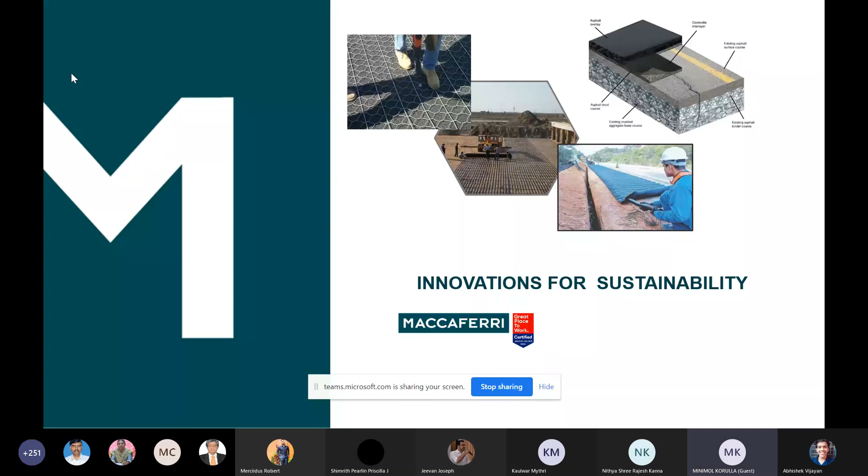But what we need to see is whether the knowledge, the selection criteria, the monitoring part, the quality considerations, whether the awareness is really penetrating to the academic arena. That is very, very important. Without it being implanted in the mind of the future engineers, it can never ever become an accepted popular technology. So I take it as one of my missions that wherever it is possible, I try to share this part of the knowledge and see what are the frank feedbacks and responses coming from the new generation. So I would like to understand the feedback from all of you. You may not have to share it with me immediately, but you can very well write to me later.

So the flow of my presentation is some introduction, of course, then pavement optimization and drainage. I talk about the aggregate scarcity. Kilometers and kilometers of road are getting developed in India, getting repaired, and we are hearing that even in the COVID time, one of the agendas of the government is to make more infrastructure projects happen.

So the road sector and the railway sector are going to be the main fields where the government wants to invest money. But at the same time, the natural resources we cannot use in plenty. So pavement optimization, if some material or some technology is helping us, that is really a very appreciable move.

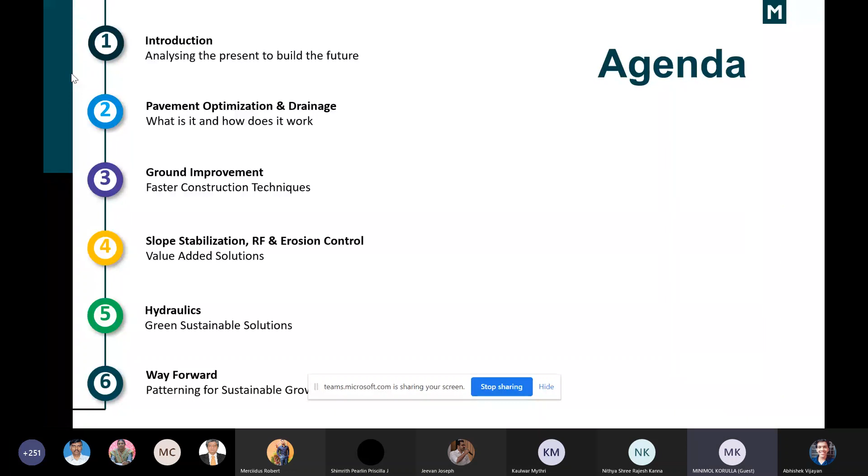Then hydraulics. Definitely, we do have a very big coastal environment, and India is a land of rivers, especially holy rivers. But all these rivers and our coastal areas are subjected to a lot of erosion and other calamities. So we need something which can protect and stabilize these shores which are subjected to hydraulic forces. So these are the main touch points which I want to share with you, and what can be the mission forward.

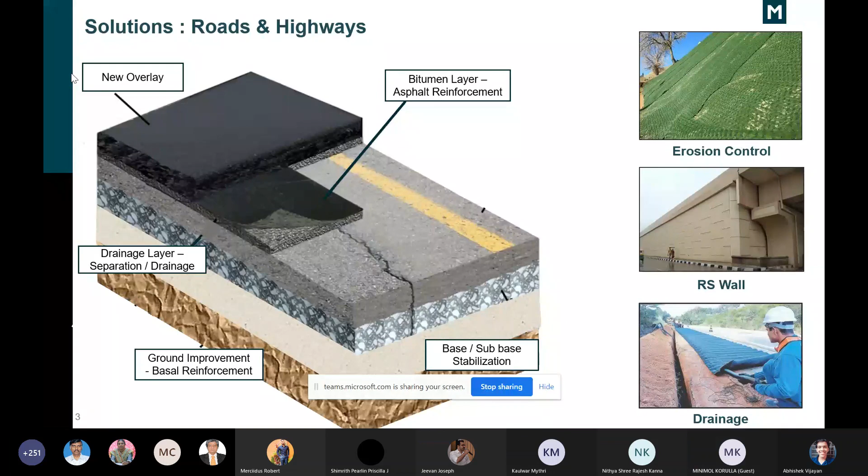So coming to roads and highways, I'm more talking about flexible pavements, even though these types of innovative products can be used in rigid pavements. One of my earliest works in India started with rigid pavements, but let me start with flexible pavements. We know that the flexible pavement is made of different components, starting from the bituminous part, then base, sub-base, and subgrade. In the base and sub-base, the aggregate consumption is maximum. If we can introduce one material which may have an extra cost, but at the same time the aggregate thickness can be reduced, then definitely it will be an advantage, provided the durability is also enhanced.

So one of the geosynthetic products which is helping us here is geogrid. So now comes the question: if I am introducing a geogrid in a pavement layer, the durability is enhanced and the thickness can be reduced, then how do I know which type of geogrid has to be used? So a selection criteria is required. Where will we get the selection criteria? When we are talking about base and sub-base treatment, we will get the selection criteria from the specifications in the Orange Book.

I don't know whether you are aware of the Orange Book. The Orange Book is the standard specifications written for the Highway Ministry for every construction material. For all geosynthetics, Clause 700 is completely devoted to geosynthetics. In Section 700, we will get the specification of the geogrid which can be used for base or sub-base reinforcement. In the same chapter, you can get the specification of the drainage composite for the drainage function, as well as for asphaltic reinforcement. If we want to reinforce the asphaltic layer, again for increasing durability, we can go for geosynthetic inclusion or glass fiber inclusion. That is also in the Orange Book.

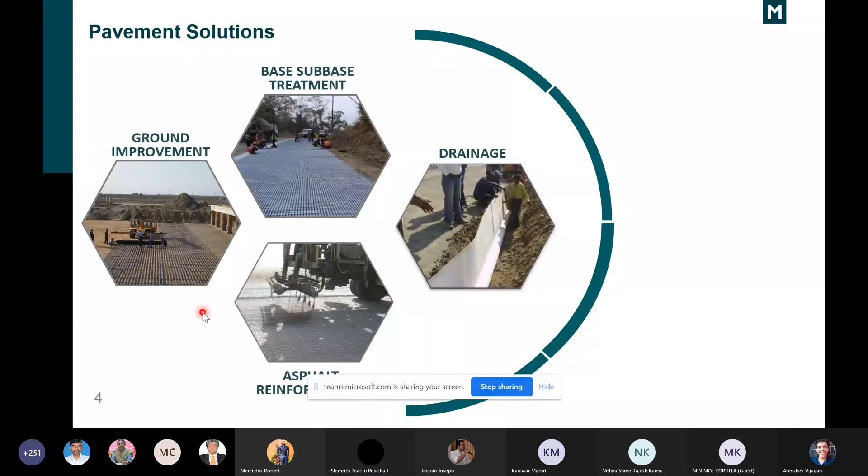Okay. So the summary of this slide is the geogrids. It is a tension element. We will come to that more. Geogrid is a tension element. It can be used in base or sub-base reinforcement of the pavement, which can reduce the thickness and it can increase the durability. It can be used in ground improvement, where we can combine it with the PVD, or it can combine with the stone column, or it can combine with the piles.

It can again be used in asphaltic reinforcement, maybe with the glass fibers or as a standalone product. And this will increase again the durability of the asphaltic layer. It will reduce the tendency of reflective cracking and other types of cracks.

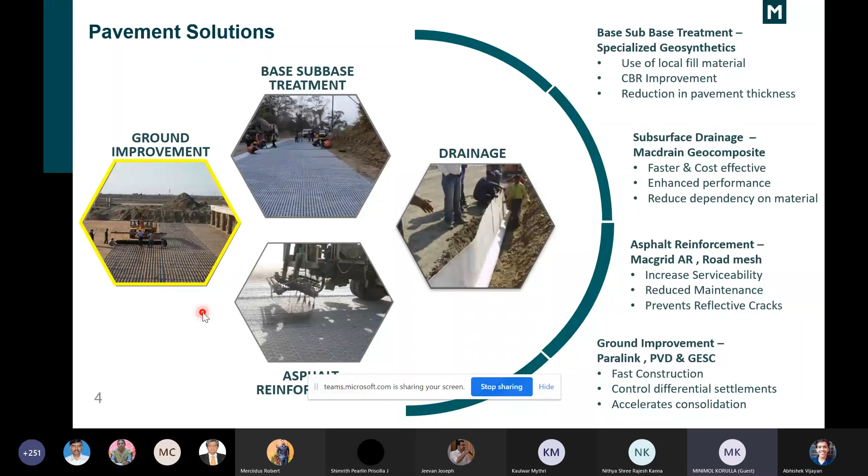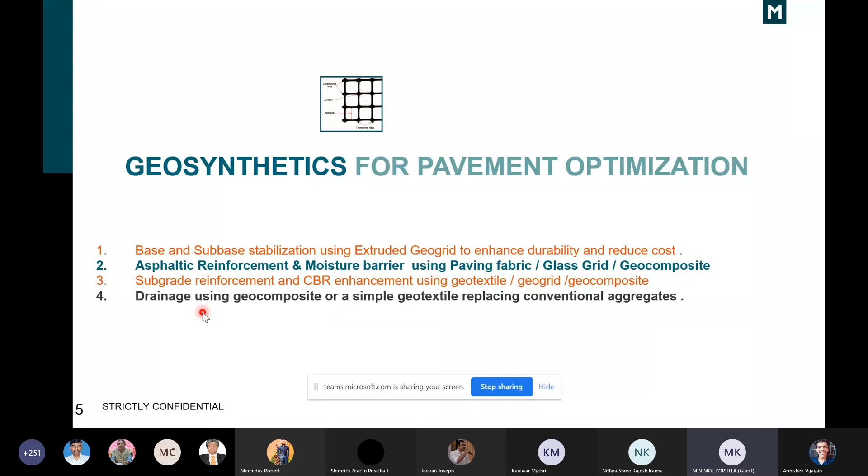So now the question is the pavement optimization, how these geosynthetics can be used. Okay. So before that, what are the other types of geosynthetics? Okay. So geogrids, we have seen that they have very popular applications, but it is one part of the family. Okay, there are brothers, sisters, and cousins. So we will see which are the other materials which are useful for civil engineering applications.

So the first is geotextile. It is a cloth, and even here subfamilies are there, like woven geotextile and non-woven geotextile. So woven geotextile is something where, like a textile, warp and weft direction is there. Non-woven geotextile is usually classified as needle punched or thermally bonded, depending upon the manufacturing method.

So the different polymeric filaments, if they are bonded by thermal means after being randomly placed, it is called a thermally bonded non-woven geotextile. Okay, it will be randomly placed. It will not be placed in warp direction and weft direction. If the bond is by mechanical means, like it is pressed together, then it can be called a needle punched non-woven geotextile. So non-woven geotextiles are basically used for hydraulic purposes, like separation.

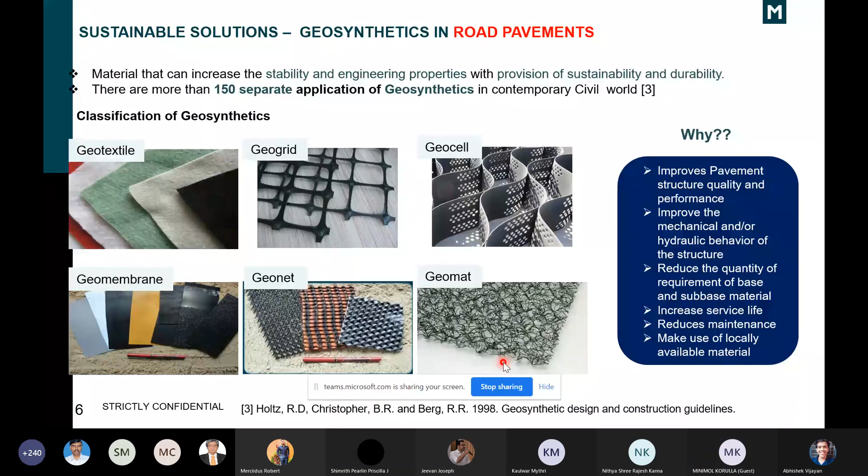So we talked about the base and sub-base application of the GeoGrid, as well as subgrade, asphaltic reinforcement and drainage. We can start again with the roads only. As I mentioned, when we are placing a geogrid, especially an extruded geogrid with higher junction efficiency, it will increase the interface friction and interlocking of the aggregates, and there is a membrane effect.

So when the traffic load is there, and even the dead load of the pavement itself is acting on it, different strains will come in the pavement layers, tensile and compressive in nature, and the geogrid, wherever it is inserted, will bend like a membrane, and this membrane can give extra mobilized shear resistance like a pre-stressed tendon, contributing additional strength. So with these three mechanisms, the resistance offered against traffic loads and self-weight will be much better than the non-reinforced pavement.

And as I mentioned, the drainage composite, the drainage net sandwiched between two geotextiles, can replace a subbase, especially the drainage component. So when we are using these products together, we may be able to reduce the pavement thickness significantly.

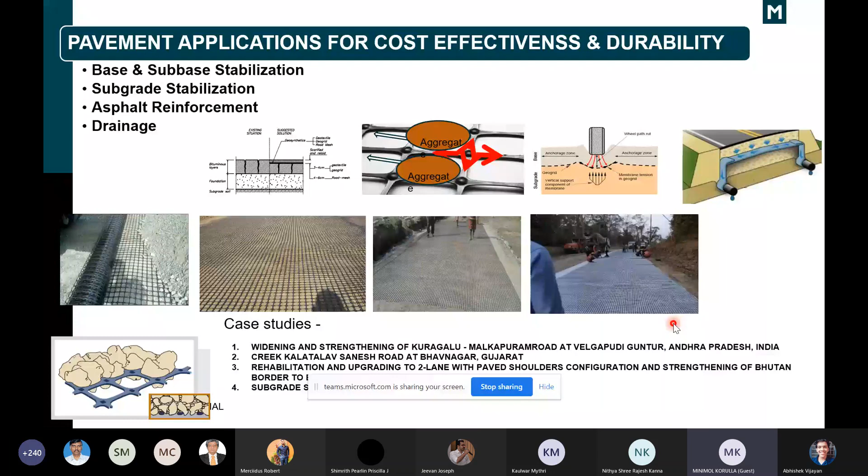Now coming to the asphaltic reinforcement, we can use polymeric products as well as glass grid, and sometimes a combination composite combining the paving fabric and glass grids. The advantage is the prevention of reflective cracking, where cracks propagating from the bottom layers of the pavement come to the surface, and during monsoon time water goes inside and the cracks become wider. This gets prevented by the inclusion of a paving fabric or a composite where glass fiber elements and polymeric elements are combined.

So how does the selection happen? It depends on the traffic load, the type of durability we want to enhance, and of course the fund availability. For example, glass fiber inclusion is one of the cheapest, whereas there is a steel mesh called road mesh which can be incorporated as asphaltic reinforcement. If we want to increase durability by say 20%, we'll go with glass fiber only. But if we want to almost double the durability, we may go for the road mesh, though the cost will be more. If glass fiber inclusion costs say 200 per square meter, road mesh may be 600 to 700, but the durability will be almost doubled.

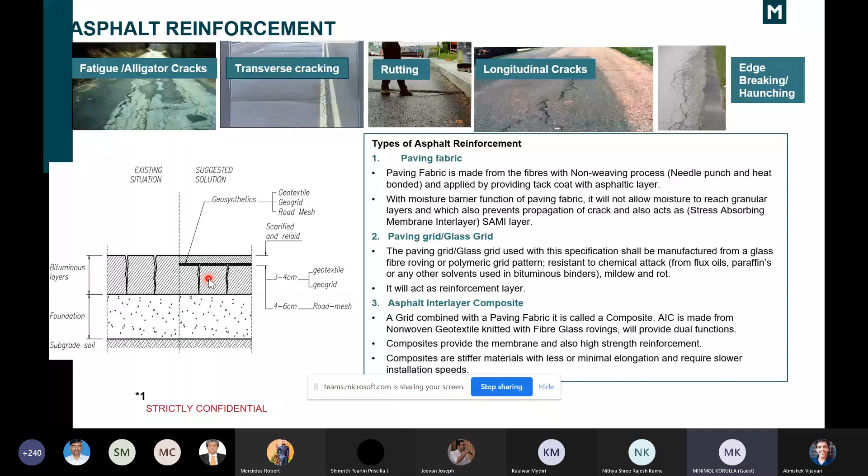So the design factors are, apart from the strength, the stiffness of these elements as well as the pavement components, the CBR value, the modulus value. Apart from that, definitely the durability is one of the design data, and the fund availability will also be governing as one of the inputs which need to be considered.

Now coming to the drainage. We already spoke about the drainage composite, which can save space, which can save aggregate, and it can be used in the horizontal direction as well as the vertical direction.

So what are the horizontal utilizations of the drainage composite in railway track or in roads? When we are going for a road, we have to give the longitudinal drains as well as provide transverse drainage. We have to give culverts, and even in the pavement, we have to give the subbase layer.

So here, when we replace it with a drainage composite, what are the main considerations? The main considerations are the ability to carry water, the discharge carrying capacity is the most important. So here comes the comparison.

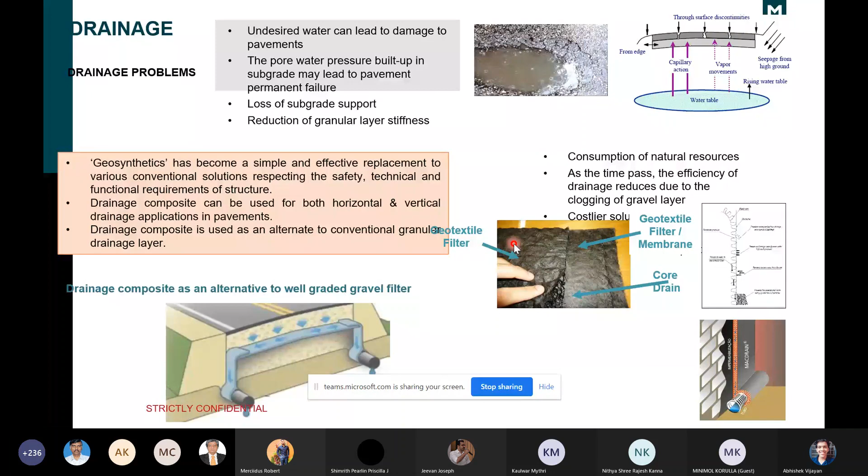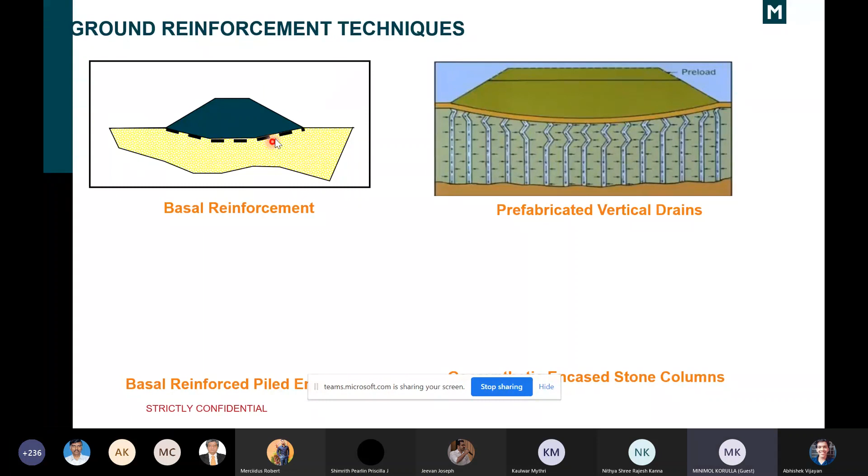Okay, now let us go to another application of geosynthetics: ground improvement. The geosynthetics have a very good ability to reinforce the ground, acting as a basal reinforcement.

It can do wonders. In many projects, one of the projects which was a real challenge to address the liquefaction potential was the Gangapath Expressway. I was involved in that project and we were really worrying how to account for the liquefaction potential, and at the same time the project had to be completed within a specific time with a budget limit. The basal reinforcement, a bonded geogrid, we used in Gangapath Expressway, and that eliminated the use of very deep ground improvement techniques.

Of course in some places they had to use dynamic compaction with the basal reinforcement, but in many places the deep ground improvement requirement was eliminated by the use of the basal reinforcement.

So it acts like a raft which allows redistribution. It will be a stiff layer. Usually the basal reinforcement will be a geogrid which has high stiffness and high strength, and this material will act like a raft redistributing the pressures.

There will not be any chance of localized strains or stress, and to a good extent it will eliminate differential settlement. It will not nullify the settlement. If anyone tells you we can use GeoGrid and eliminate settlement entirely, that is totally wrong. It will not nullify the settlement, but it can minimize the differential settlement.

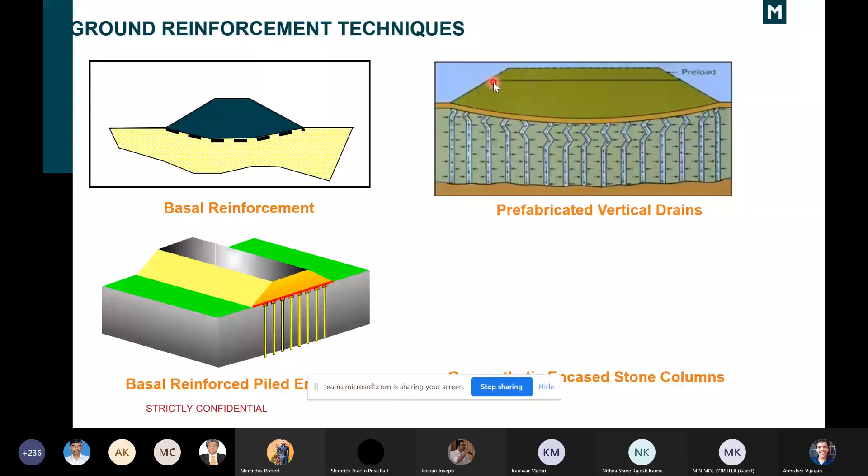So basal reinforcement, there is a design code which is published by Indian Road Congress, which is IRC 113. It is talking step by step the different principles. It will be definitely guiding the civil engineers, especially the foundation engineers and the structural engineers and highway engineers.

If we go for constructing a highway embankment over a soft soil, especially if it is in a coastal city like say Chennai or Visakhapatnam or Kochi or Calcutta. So many times we may have to construct big embankments over very soft soil, which is extending up to 20 meter or 40 meter. So that time we can really think of using a basal reinforcement for controlling the differential settlement, improving the resistance against rotational stability, sliding stability of the embankment soil, and if there is a tendency of lateral extrusion and plastic squeezing, that will get prevented.

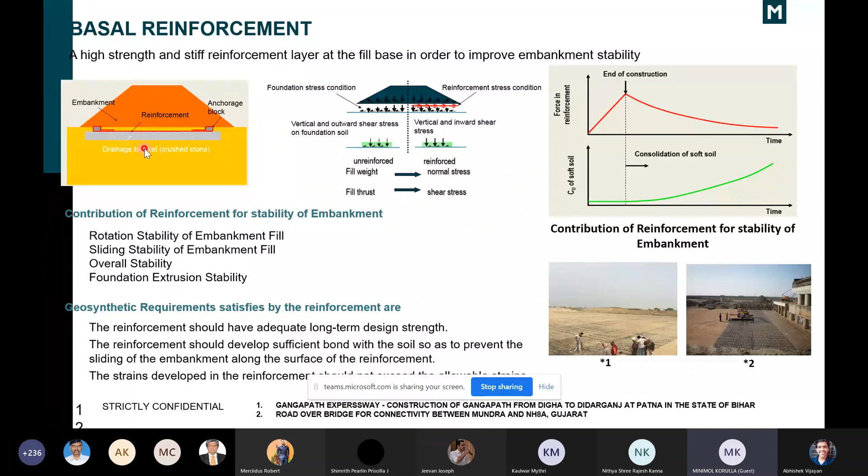But many times when we are using a basal reinforcement, we may not be getting enough anchorage length. Okay, there should be a certain length beyond the side slope so that it can get anchored. So in that case, we may have to use two anchor blocks at the end, and this geogrid can get wrapped around on these anchor blocks. So prefabricated vertical drains, I'm skipping this because the geosynthetic component is minimal there.

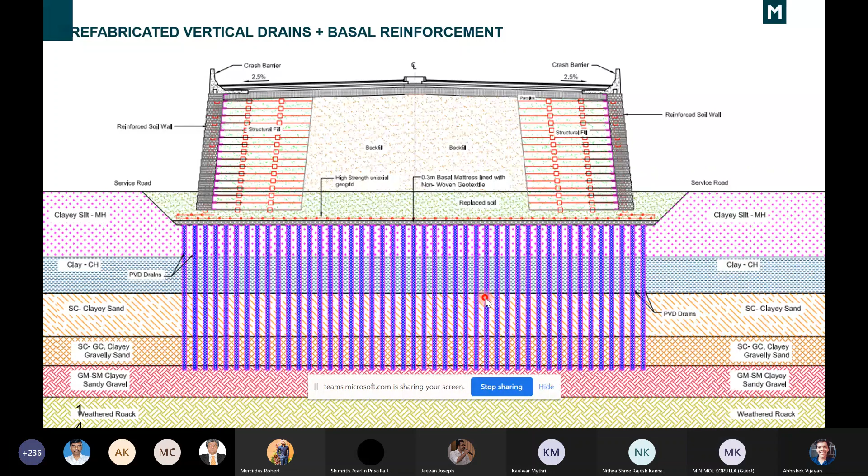So the stone columns, in that my area is not just a stone column, it is in fact geosynthetic encased stone column. Suppose if I am making a stone column, what is stone column? I am making pits in my soft soil, which is soft clay, for example, soft clay. And there I am putting my stones. Will my stone column stand there? No, the stone column may get bulged out. So if I am inserting a geosynthetic encasement, it will be called as a geosynthetic encased stone column.

And in that case, what my encasement will do? My encasement will act as a stiffening layer, which is giving an extra strength, and I can use it as a filter and separator also. It will not permit the clay to interfere with my good stones and contaminate it. So it will act as a filter and separator also. So geosynthetic encasement, it will increase the strength, it will increase the stiffness, and it can act as a filter and separator.

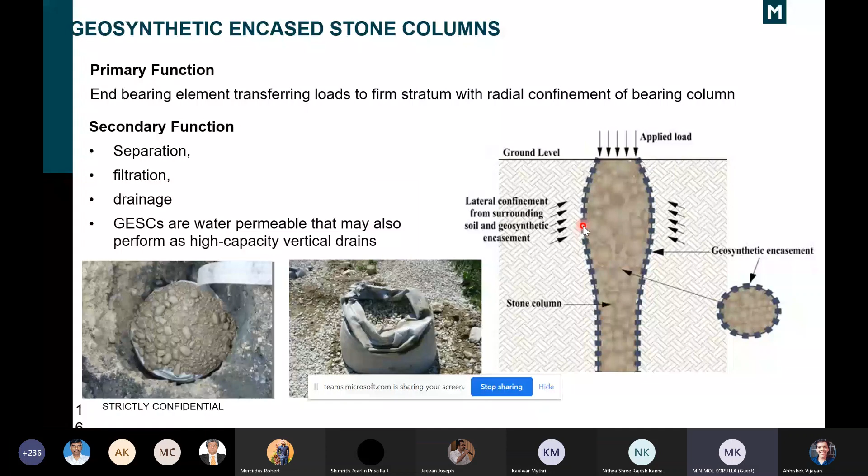So for the geosynthetic encased stone column, what we are facing at present in India, the complete design guidelines are not available. So far we are using the German guidelines, but the references about the geosynthetic encased stone column, it is in the IRC 75, the latest edition, as well as it is there in HRB 13 and 14, which is published almost 20 years before. So the code is permitting us to go for the geosynthetic encased stone column, but it has not become enough popular because for the design and analysis methods, we still have to go for the German codes.

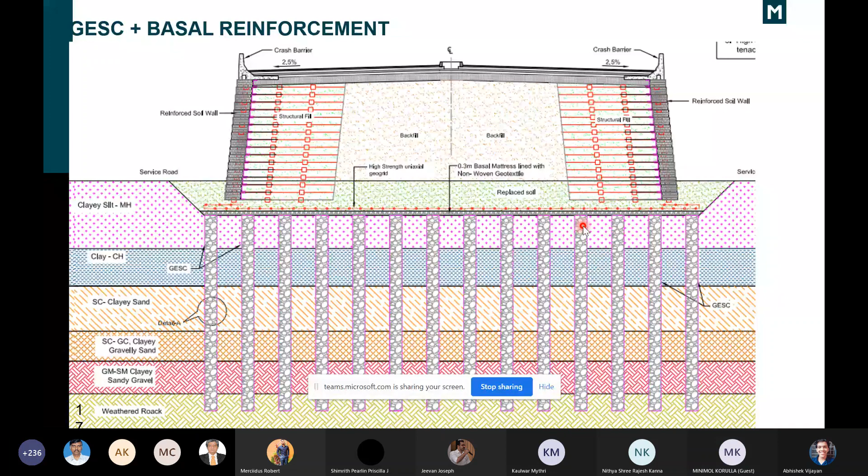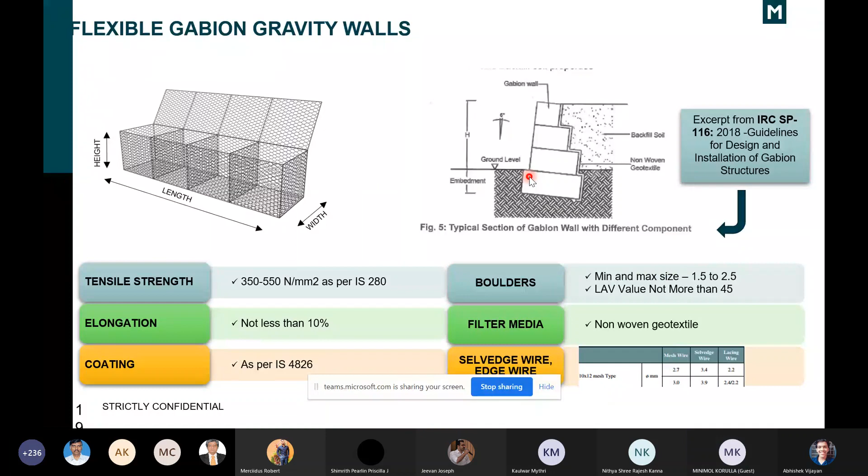And the advantage of this type of structure is it is flexible. So there will not be any cracks or any type of eccentricity getting developed in a gabion wall. So we can reduce the foundation requirements to a minimum. Second, the advantage of this type of structure is the vegetation can easily take its roots through it.

So during the monsoon, many of us have seen a lot of retaining wall failures, but these types of gabion structures are permeable. They will allow the water to go through, so this sudden increase of pore water pressure will not happen there. And as I mentioned, even big tree roots can take their way through the gabion walls, and tree roots will only stabilize it. It will not crack it.

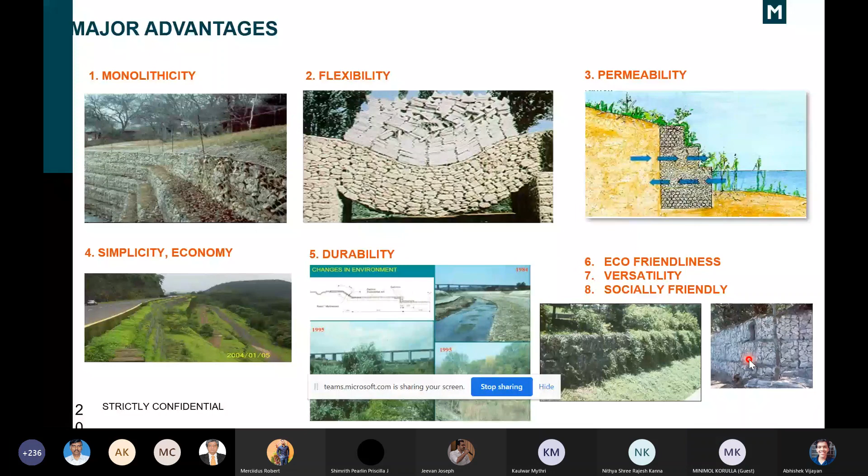So then another application of these flexible structures is reinforced soil structures, as I mentioned. Whenever we want to construct a steep slope, if it is a very gentle slope, say less than 45 degrees, then we can go for just slope stabilization and erosion control. But when we have to construct a steep slope, we may have to reinforce it.

And reinforced soil is no longer a new technology. It is very popular in India. In fact, it may be interesting for all of you, and we can be proud, that among the different countries in the whole world, the maximum fascia area of reinforced soil construction is at present happening in India. Even with my colleagues abroad, I'm talking in lakhs and lakhs of square meters when they are talking in hundreds of square meters. So that is the way reinforced soil became popular in India.

One of the main reasons is, when it comes to India, it is always the economic advantage, the big saving potential. Okay. So usually reinforced soil will give a minimum 25 to 35% cost advantage if it is a comparable, reasonably good soil. And the cost advantage usually increases if it is a poorer soil. As the soil condition goes down, its economic advantage will increase.

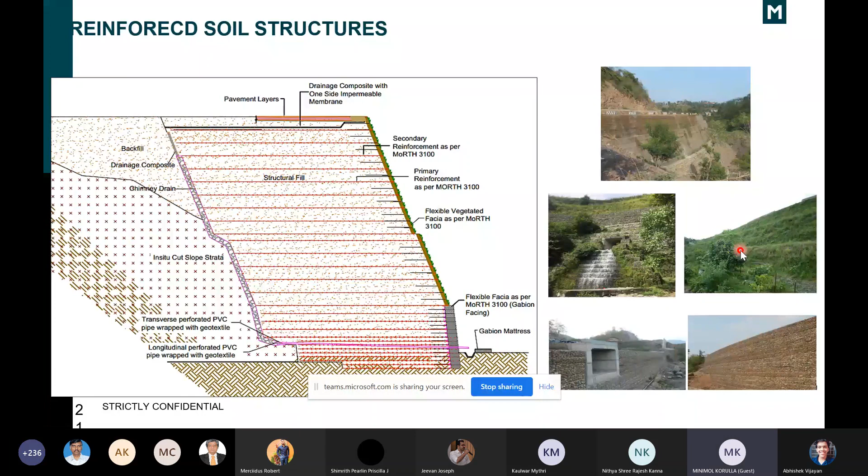So I talked already about reinforced soil structures. The main reinforcement can go like this. Then the fascia: if it is a gabion, the gabion will have an integrated tail, or it can be a vegetated fascia where a woven mesh element with a coir geotextile together will facilitate the vegetation, which can create a very beautiful aesthetic appearance like this.

Or if you like a stone fascia, you can go with a gabion fascia, provided good stones are available. We can use any stones which are normally used for stone masonry. Or if you want a concrete fascia, okay, in city limits and all, sometimes we may not want a gabion fascia, we may want a concrete finish.

So in that case, we can go with a concrete panel or segmental block. All these, concrete panel, gabion, vegetated fascia, are erosion control measures, whereas the main element, as I told, our hero, is our geogrid, which is going inside and has a high strength and stiffness value.

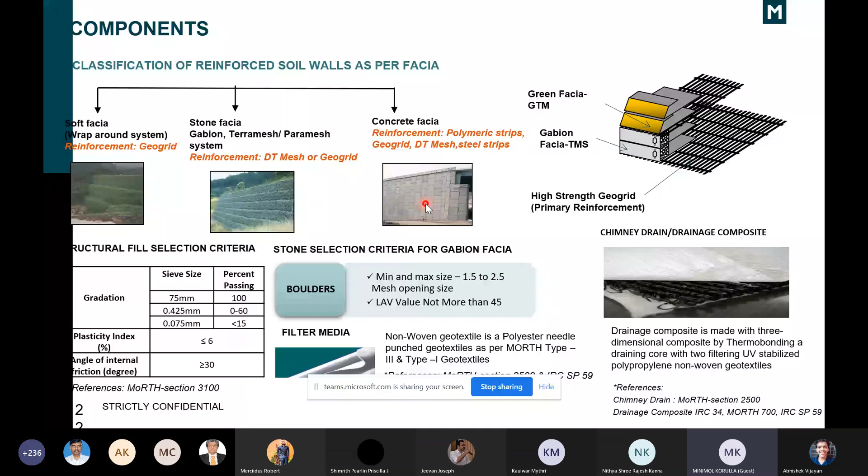Okay, now I am touching one more area, that is rockfall mitigation measures. I mentioned this earlier. I want to touch this also because nowadays, apart from all my other work, I find a lot of happiness in being engaged with disaster mitigation work, especially where my expertise has some meaning, like slope stability, and in that a very peculiar type of slope stability issue, which is in Himalayan terrain, our Konkan terrain, and in Nilgiris, that is actually rockfall.

Okay. So a warning measure is where digitally we can give a warning to the user or a driver who is driving a vehicle that a rockfall can happen in a particular place, and that will prevent the disaster. So it is not preventing anything, it is just a warning. Second is a protection measure. Like in a slope, if you are providing a berm or benching, the rock will not directly fall on a vehicle or a passenger. By the time it is falling at the berms, its energy will be lost, and finally it will be a non-risk activity.

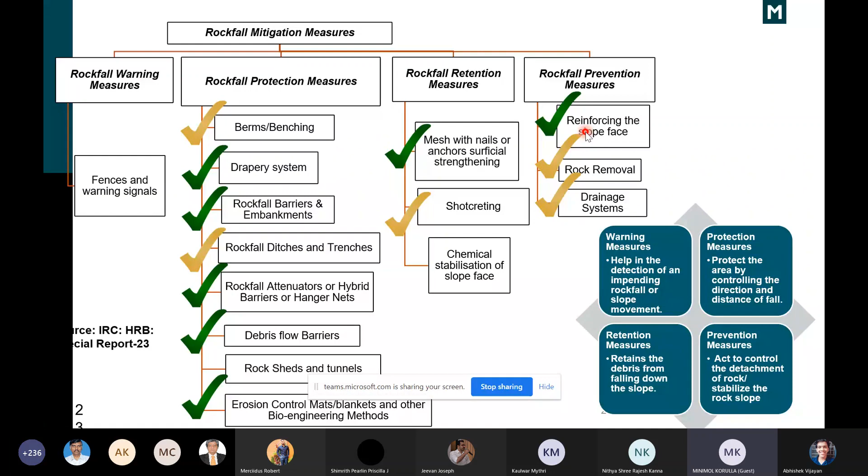Okay. So when a barrier is being used, as I told, steel barriers are a replacement of the earlier rigid concrete barrier. One of the advantages of using a steel barrier is you can go with a minimal foundation, and these steel barriers are certified by a specific crash test. What is a crash test? When a particular company is producing a steel barrier, I cannot just produce a barrier and say this barrier will work, it will absorb this much energy, it can be placed in a particular place in the Himalayas, it will prevent all rockfall. No, I have to get the certification; only then will I be considered an authorized manufacturer of the steel barrier.

And for this certification, there are certain codes and guidelines. That is already covered in this Indian Roads Congress HRB. And the Bureau of Indian Standards is formulating the guideline for the standard terminologies as well as the test methods for these barriers. And of the barrier components, the most important part is what you are seeing, the mesh which is forming the barrier. For that, an Indian standard already exists.

Okay, so that is the good news. ISO, IS 17745 and 46 are talking about all the different meshes which can be used as the steel barriers. It was an ISO document, and that was adopted by Indian Standard last year. And these ISO IS documents give the material, the terminologies, the testing method, and how it will work. And if any time repair has to happen, how it is to be done, so that n number of times the same barrier can be used.

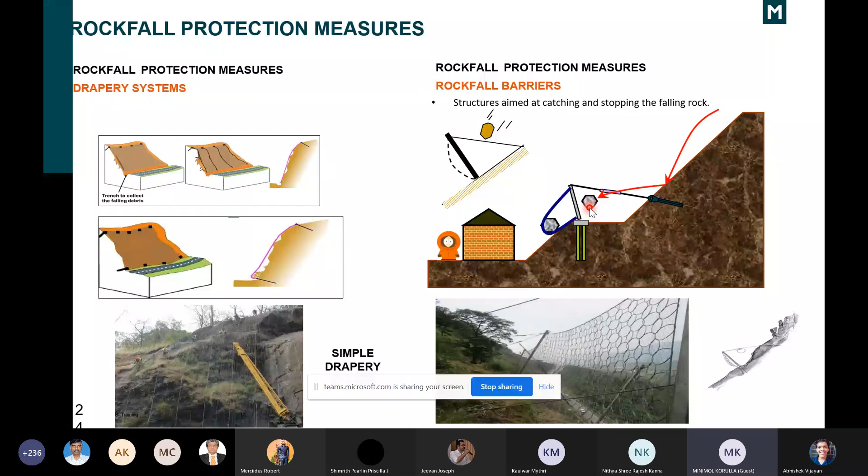And even for these barriers, where the barrier is to be placed depends on the projectile motion. Again, there are softwares which are really helping us to understand the different types of simulation, which is the worst critical type of combination, and where we have to place the barrier to prevent a rockfall. Interesting, isn't it?

So where we are having some space, we can create a trapezoidal embankment. There we can go for the earthen embankment. And it can be reinforced if you want steep slopes. And currently in a project happening in Jammu and Kashmir, rockfall embankments are being used. It is not rockfall barriers.

Another rockfall embankment we have done for Saptashringi temple. So in front of the temple, barriers and embankments were to be constructed. So where space was available, we went for an embankment, and where barriers could be conveniently placed, we went for the barriers.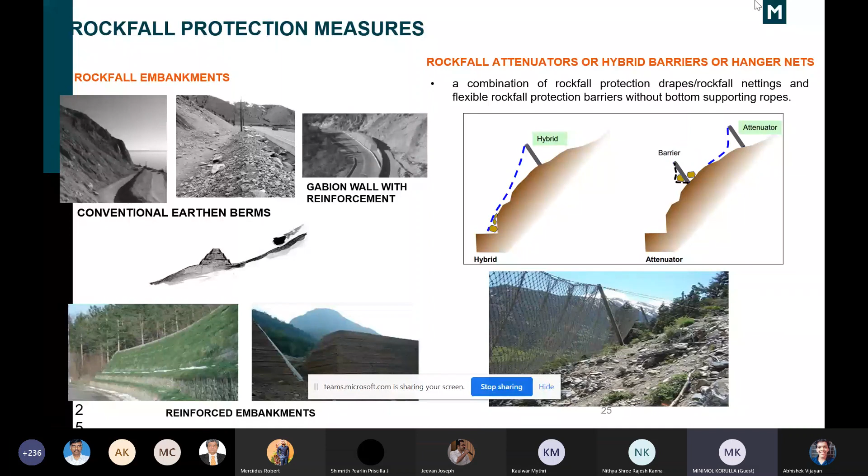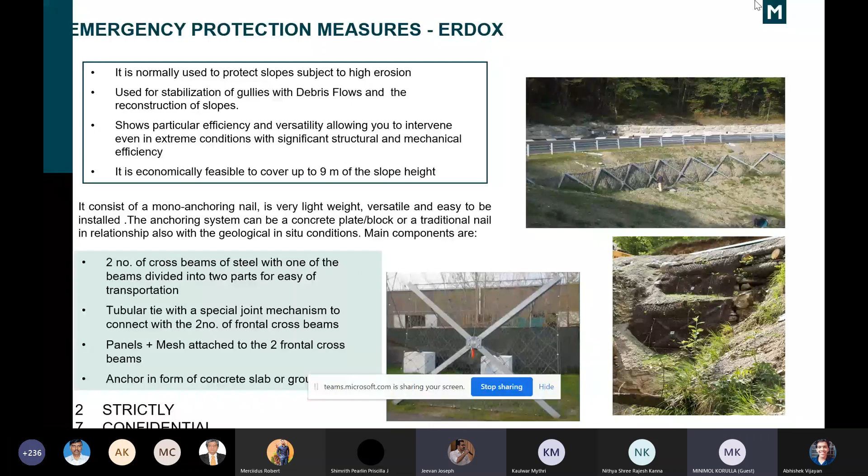So I'm stopping here because I really want to hear your response. I do have more slides, but I prefer to hear from you before continuing with the rest of the slides, as we have already taken almost 1 hour. So I would like to hear any queries or any feedback. Then while I am answering, I can use my remaining slides also.

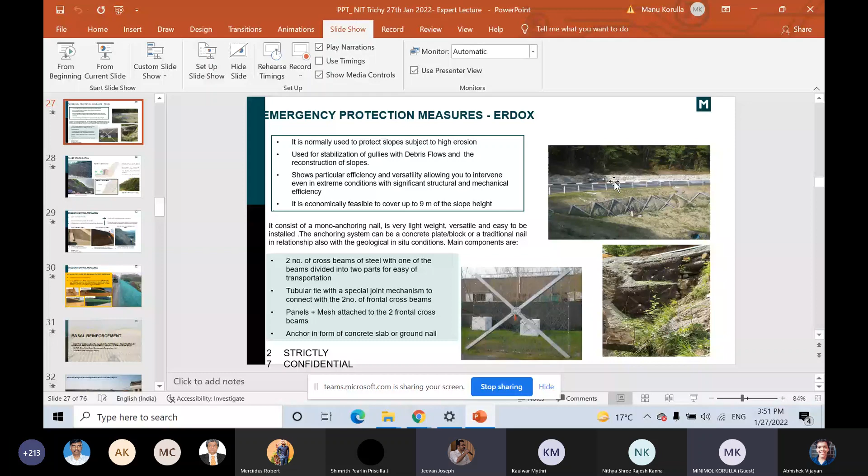I request students to drop. I think, ma'am, actually the voice privilege is not given to all the students. I request a few of the students to drop their questions in the chat box. Otherwise, you can raise your hand so that we can permit you for the discussion. Manish Reddy. Yes, Manish, welcome. Admin, please ensure that we are unmuting the people who are raising their hands for asking questions. Yes.

Yeah, ma'am. Meanwhile, actually, I just wanted to have a small query, ma'am. Yes. Hello, ma'am. Ma'am, actually, very recently there was a work which was associated to the embankment erosion protection for one of the coastal area projects, which is near to Karaikal. So they were always thinking about some cost-effective methods by which they can go for the erosion protection. So while you were suggesting, I think Geomat was being advised, if I'm not wrong.